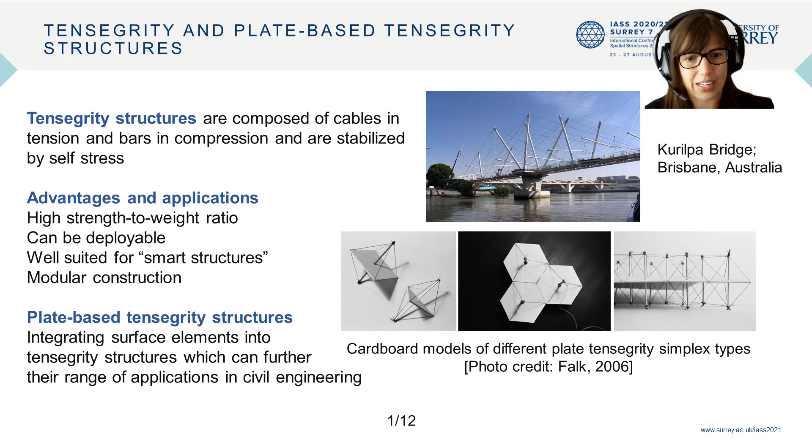superstructure. And an interesting thing that came up is a plate-based tensegrity structure, as you see here on the bottom right, utilizing kind of a new element in the whole mix. So not in the traditional definition of tensegrity structure, but allowing for a plate, an actual solid surface, to be integrated into the tensegrity structure. So we'll be looking into this type of geometry for a new structure.

By connecting the modules and cables in between these modules, we can now create a modular larger structure composed of these plate-based tensegrity units. So what's interesting is that they're modular. First of all, that's easy for construction, maybe more so than more typical construction methods. There is an architectural appeal because it is more of an exposed structure.

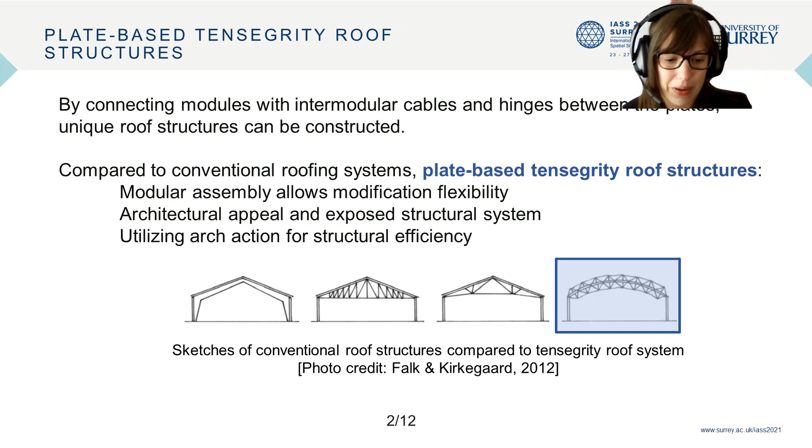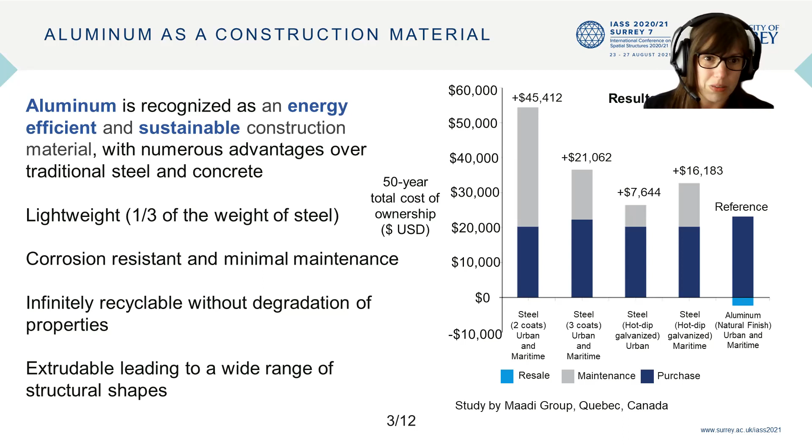So aluminum as a construction material is quite interesting. It's energy efficient, sustainable in terms of its recyclability. Yes, you need energy to mine it in the first place. However, it's lightweight, a third of the weight of steel. It's corrosion resistant, and there's minimal maintenance since it's not necessary to paint aluminum for protection against rust. It's indefinitely recyclable and easily extrudable, which means that the shapes we can get with aluminum can be quite customizable.

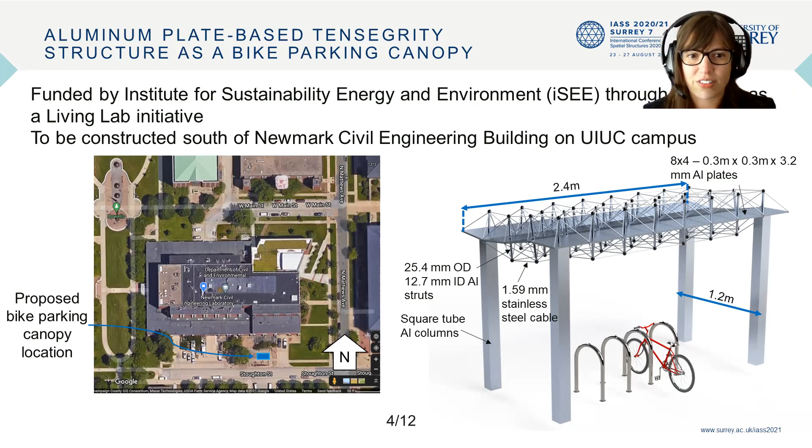It has a bit of a double curvature in one direction. The overall width is approximately 2.4 meters, a depth of about 1.2, to be placed as part of the bike parking to provide shelter from the elements. These plates are about 30 centimeters by 30 centimeters, so easily manipulable by individuals, with 1.59 millimeter stainless steel braided cables. And the aluminum square tubes are approximately 15 centimeter square hollow sections.

So here we use dynamic relaxation as a method to analyze both the individual modules and also the whole structure, using the N5B8 method as shown by Filipov here. The plate is taking inspiration from origami, and the cables and struts are the standard way we have been modeling tensegrity structures previously.

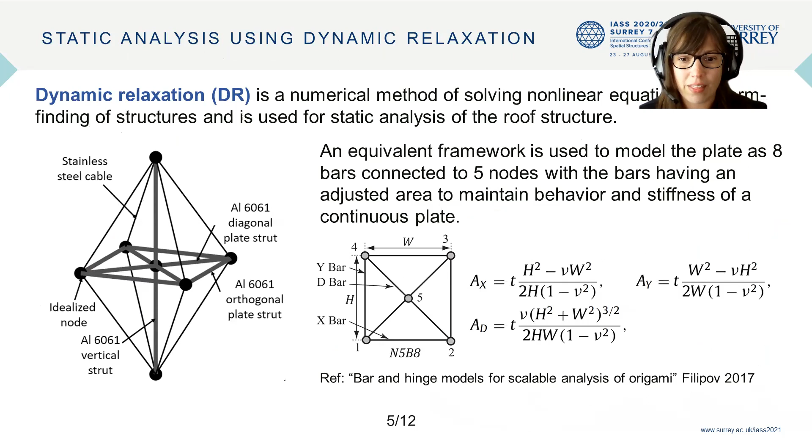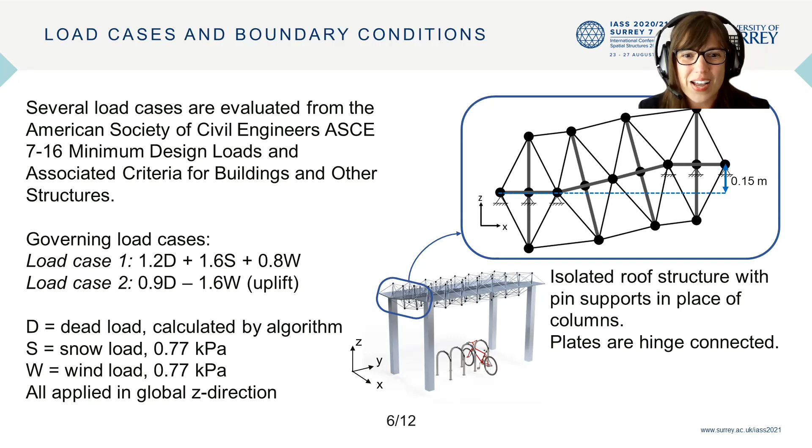So you can see here the roof structure with the cross section with that curvature I mentioned previously. We tested it for our typical load cases for snow, wind, dead, and also for critical cases such as vandalism, if someone wanted to hang on it, because it is on campus, so things can happen. So we checked all of those and sized it appropriately.

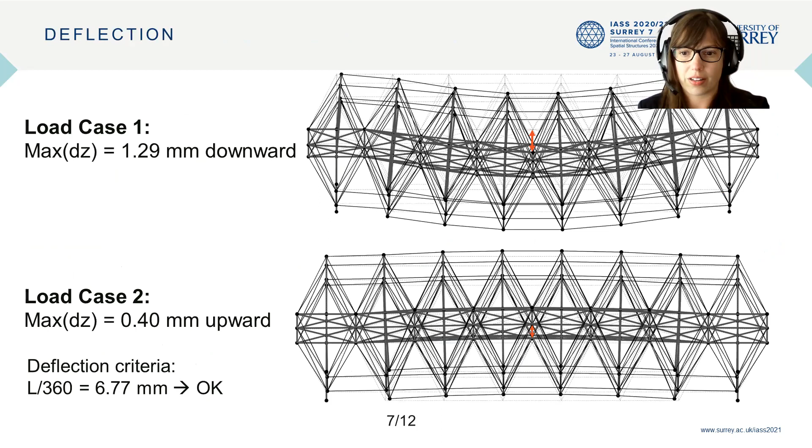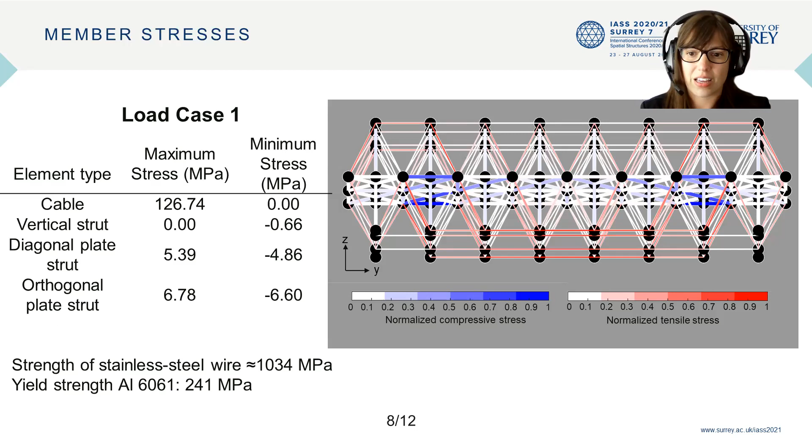Looking at the deflection, this is exaggerated, but looking at the load cases due to vertical downward loads and also uplift due to wind, we're less than L/360, so we're okay. Looking at the load cases, we're getting maximum stresses in the cables well within the limits of the cables and the struts. The struts are aluminum. And so moving forward, we also had to design the joints as well.

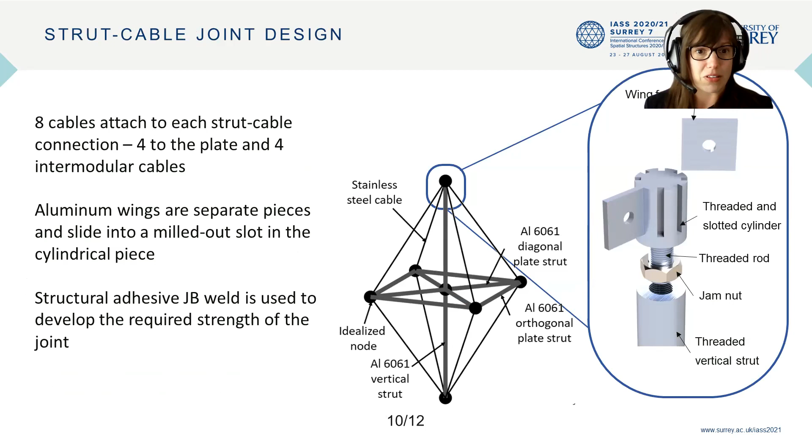These aluminum tabs are slotted and adhesively joined to that center cylinder using JB Weld. This is a very repeatable and easy process, so it can be done on campus, and it's very strong. This is in process right now. But we did some structural testing to make sure that our process, both for the cables and the tabs, is going to meet our standards.

So we did some load testing. As you can see, the tabs on the left-hand side with the downward direction load. And on the right-hand side, we loaded it up to over 930 newtons. Our demand was about 685, so we're going to be in a decent range there.

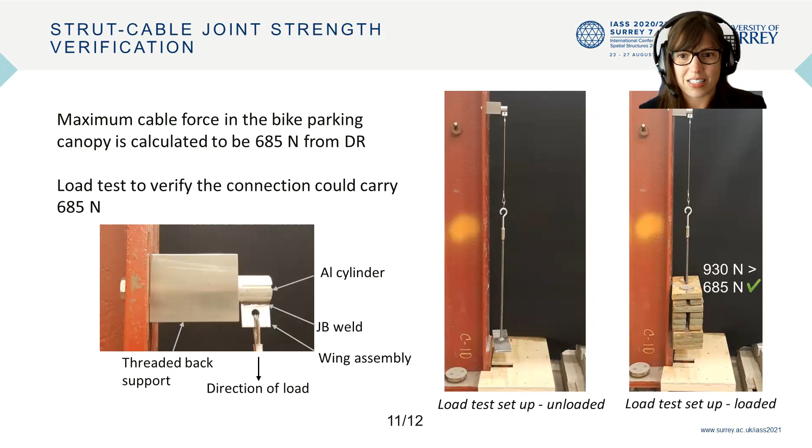So just to conclude, we were using dynamic relaxation, an equivalent framework, for showing that the plate-based tensegrity structure is feasible and to make our design sizing. This is for a bike parking canopy, so it's going to be outside, and it's within our ASCE 7 loading limits. And we're using aluminum because it can be aesthetically pleasing on campus, so we're trying to tie into some sustainability aspects there.